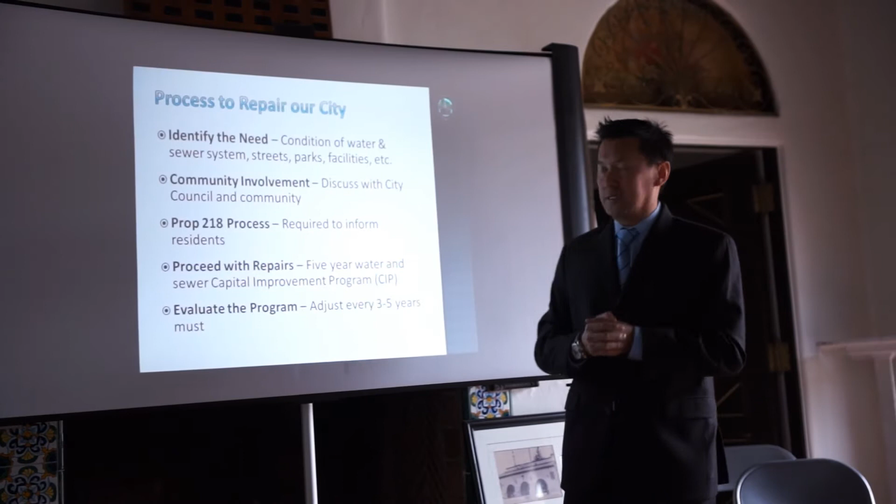Then the next part is the community involvement. We want to discuss it with the community, and we want to discuss it at council, and we said, this is what it looks like. We make adjustments to see if it's really needed and so forth. But we want your input.

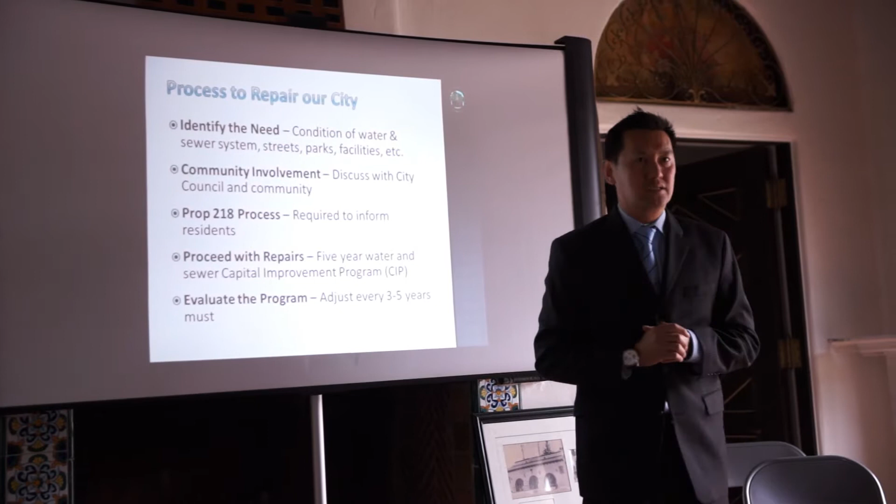What's unique with water, sewer, and refuse when we look at the repair of the system is it's required to inform the residents. And this is actually a really good process. We call it the Proposition 218 process. It's a legal process that we're mandated to notify every resident end user in Monterey Park.

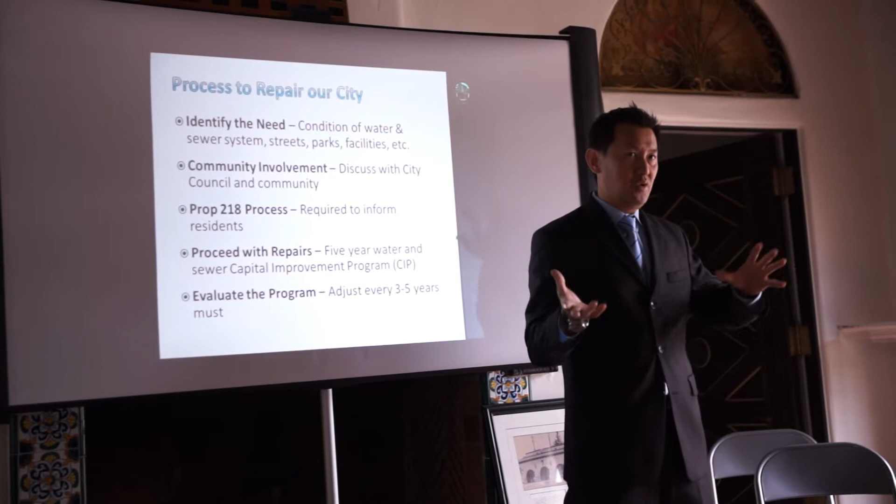Then if the community and the city council develop a proposal and they move forward with it, then we proceed with the repairs. Typically, the city would put together a 5-year water and sewer capital improvement program. We list out the projects that we have for the next 5 years, for the water projects and sewer projects, and we do annual evaluation of that.

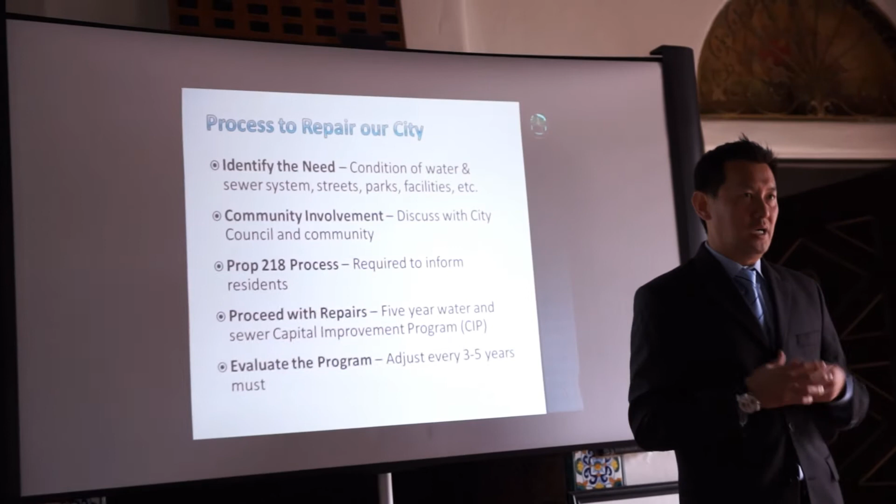We keep track of how we're doing each year, and within 5 years, we'll tell you how we're doing. And then we also have to look at the finances too. Unfortunately, money doesn't grow on trees, they don't come out of pipelines, so we have to generate enough revenue, collect enough from our community to pay for our system. You evaluate the system every 3 to 5 years.

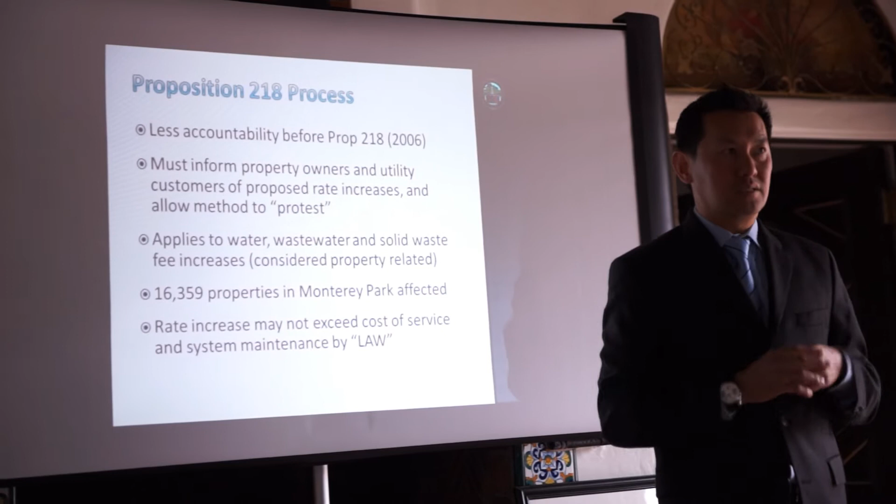So I'm going to talk a little bit about the Prop 218 process. At first, cities really did not like this process because we thought, my gosh, this is going to be a lot of work, there's a lot of concern. But it's actually really good because this brings a dialogue that's happening.

Every resident knows, every customer knows about the situation. We have to inform the property owners and utility customers, and you have an opportunity to protest. If you don't agree with the rates, you think this is not the right strategy, then you have an opportunity to protest. So again, it applies to water, wastewater, and solid waste.

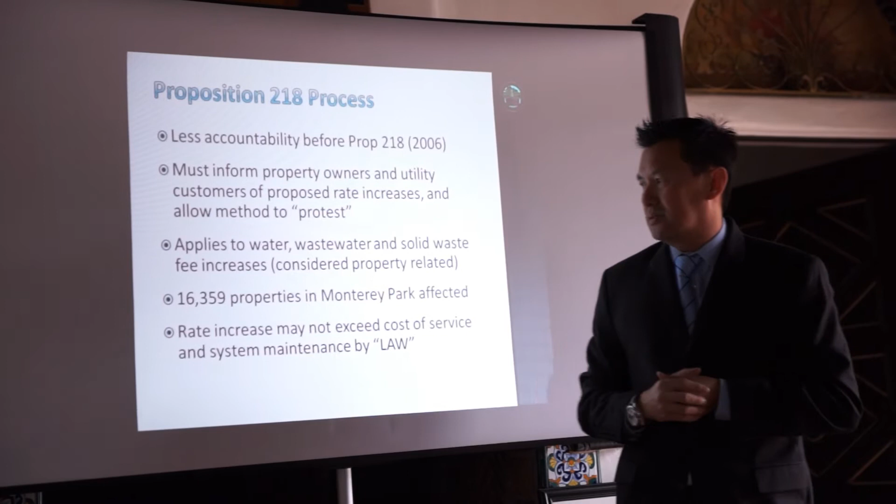In Monterey Park, it affects 16,359 properties. What I think is most important is the rate increase may not exceed cost of services and system maintenance by law. So by law, we cannot just raise the rate to some number that's out of the sky. It has to tie to the repairs that's needed.

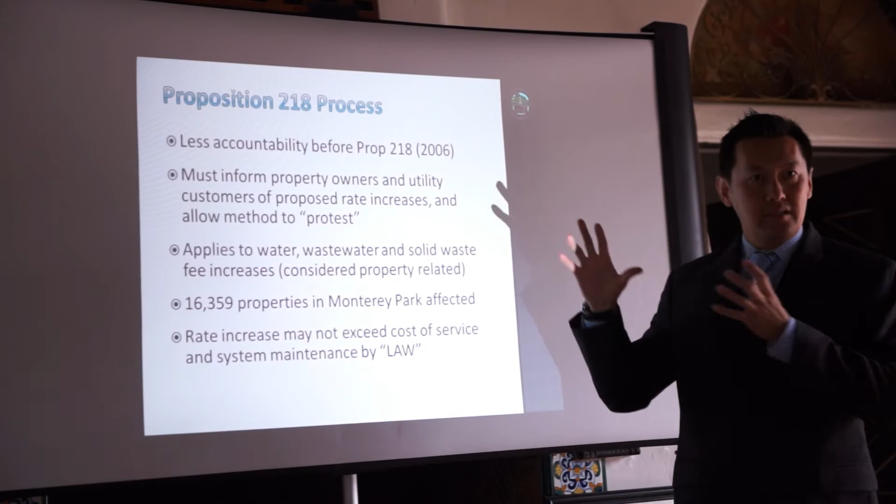If the repair is, what we're proposing is $100 million, council and the community cannot say, let's raise it to be $200 million just because. It has to tie to something. So that really connects things together.

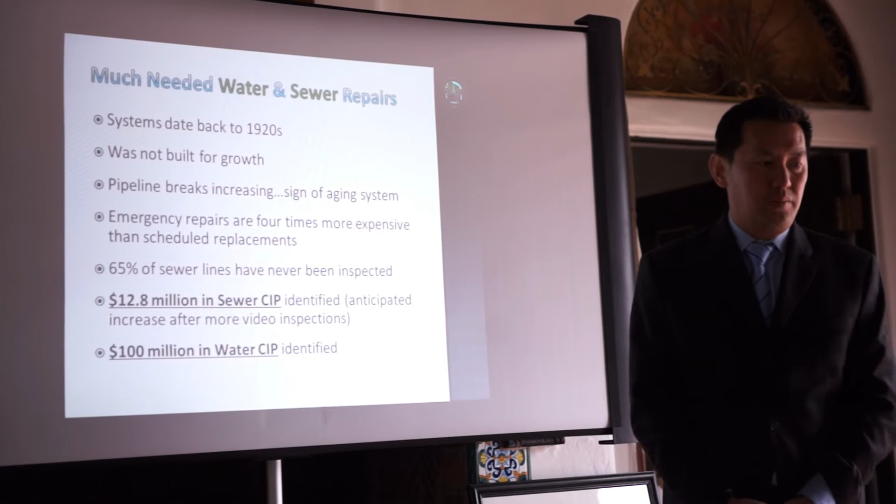So Monterey Park has much needed water and sewer repairs. The system dates back to the 1920s. That's a long time ago. It was not built for growth. When you're laying pipes into the system back in the 20s, 30s, 40s, you didn't expect this population. So it's putting more and more burden on the system.

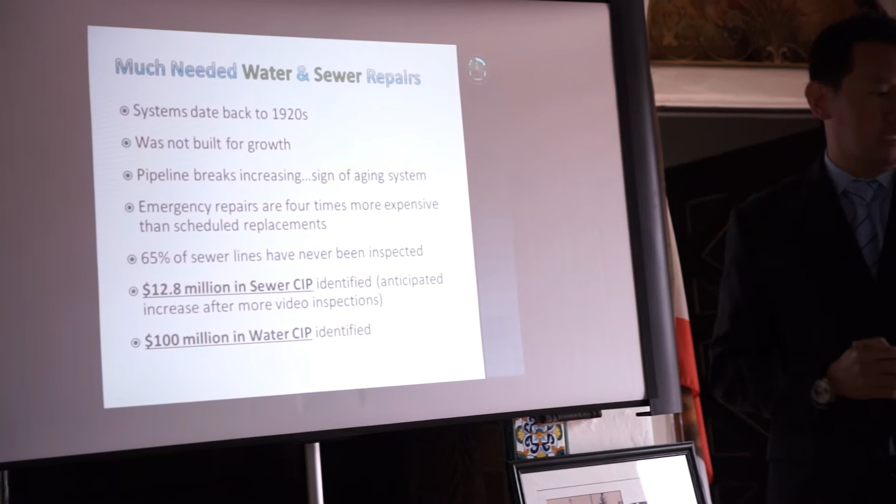And we have not been doing a good job at maintaining it. Ron will go into more detail about this, but pipeline breaks are increasing, which is a sign of an aging system. Emergency repairs are 4 or 5 times more expensive than scheduled replacement. Just like your car, just like your home, if you don't do the routine maintenance on it, it just costs a lot more to repair later on. And that's what we're trying to prevent. We want to build an efficient system for our community.

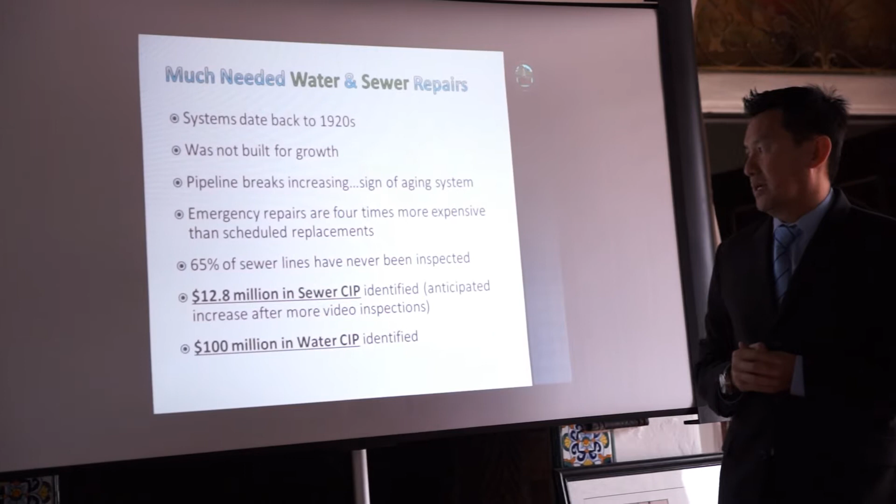What concerns me is 65% of the sewer lines have never been inspected, and Ron's going to show you some gory pictures later on. But that's pipes going back to the 1940s, 50s, 60s. No one has even looked at them, so we don't know what the conditions are, or if they're blocked or not. So it's a serious issue for us to deal with.

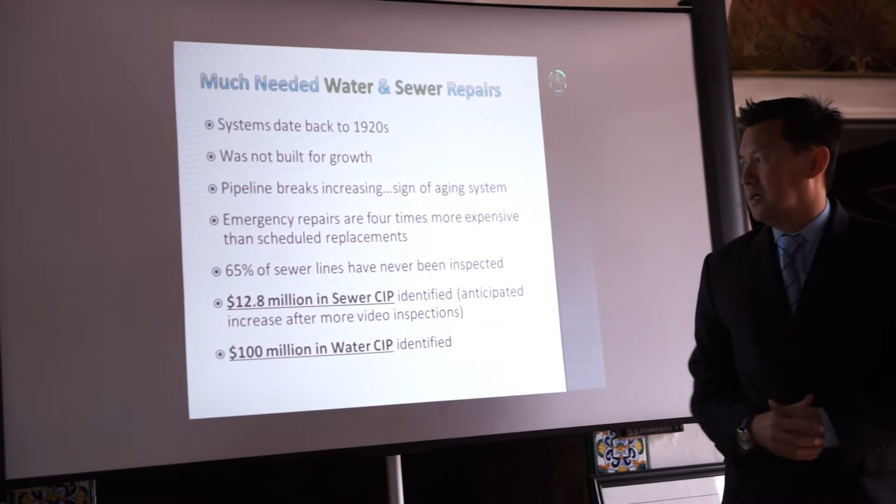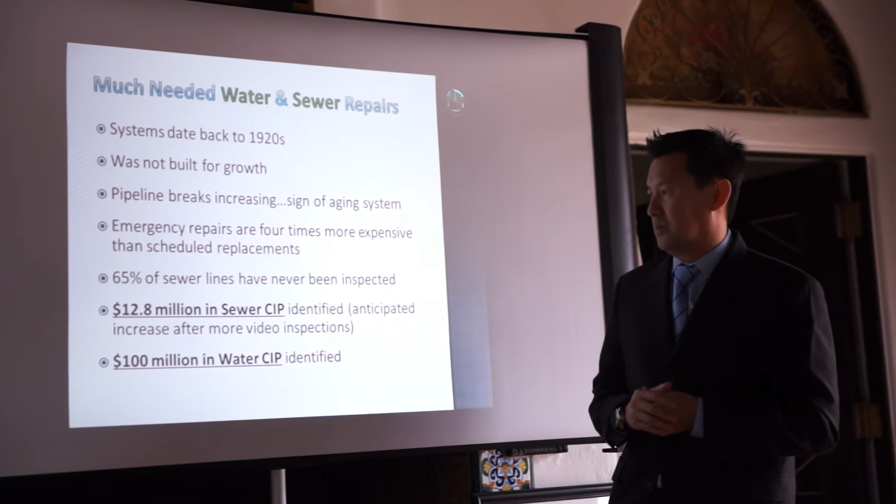So the studies we have are in two parts. There's $12.8 million in sewer CIP that's needed, and that's only on 35% of the sewer lines that we inspected. This one may go up later, but we're just focused right now on 5 years. We just gotta get some revenues in, and I'll tell you more later. And then $100 million in water CIP identified, and we'll get more detail about that.

So the council, what staff presented to the city council, 3 alternatives on how to generate enough revenues to repair our water system. The first alternative is sort of conservative: let's fix it as soon as we can so that we can avoid costly maintenance or costly repairs.

So the $100 million we were proposed, well, one of the alternatives is $100 million in 12 years, which brings in $42 million in the first 5 years. That would raise the rates too high a level, so it wasn't that successful, or wasn't that popular. The next alternative presented in the study was more reasonable.

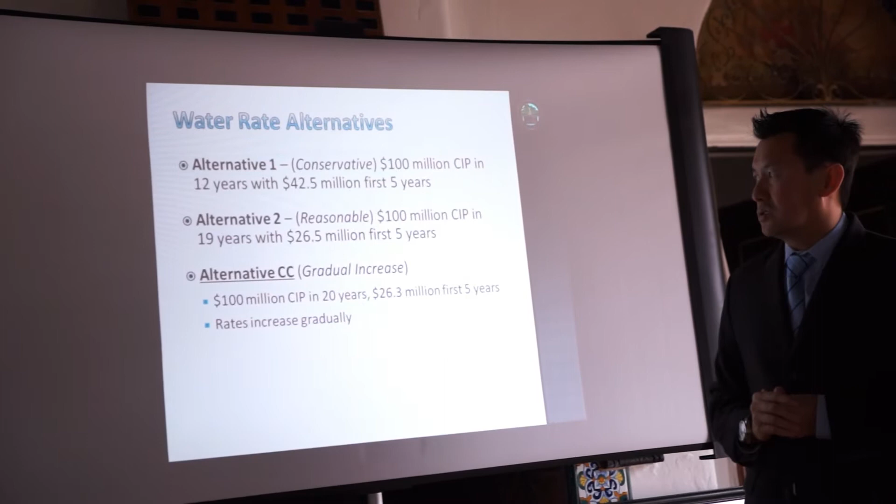It's $100 million CIP for 19 years for $26.5 million. That seems more realistic, but council looked at that and said that even that has too much of an impact on the community.

So there was another proposal, which is a more gradual increase. This one would say, next year go to the rate that's perfect, and then we'll go from there. But this one gives you a gradual increase, which gives businesses more time to adjust for the rate increases so that it won't be such an impact.

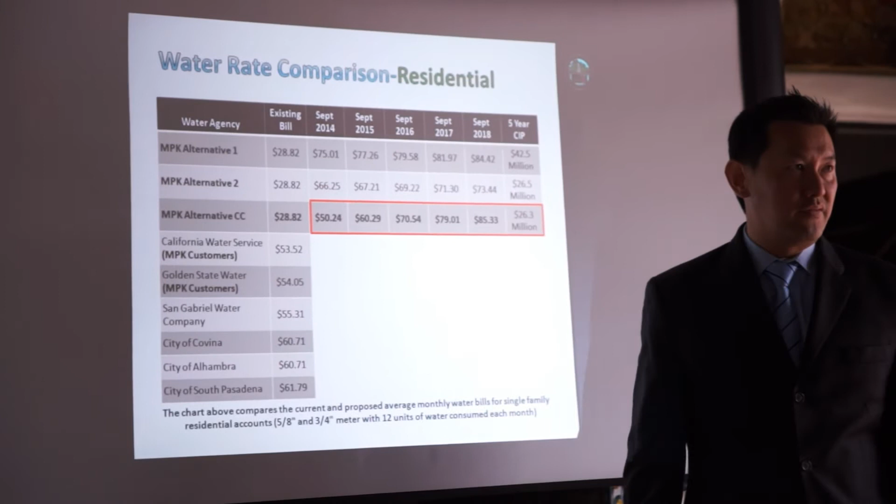Here's the 3 alternatives and the existing bill. Right now, residents are paying an average — the average resident is paying $28 per month for water services. Not all Monterey Park residents — some are served by a different water agency, and they're already paying $53 and $54. And then around the other area, the average is like $55, $60, $60, and $61.

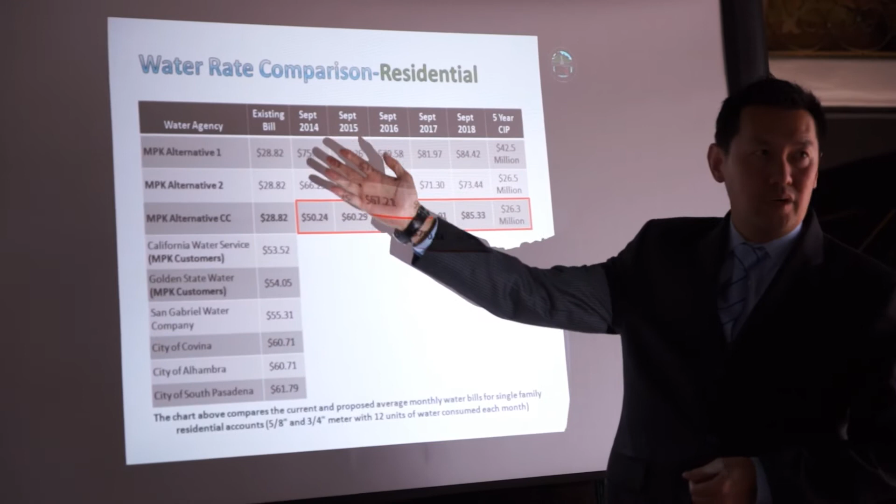So you can read this 2 ways. One is Monterey Park residents getting a great deal, but what you don't get is the repairs in the system. So that's what we're hoping to address.

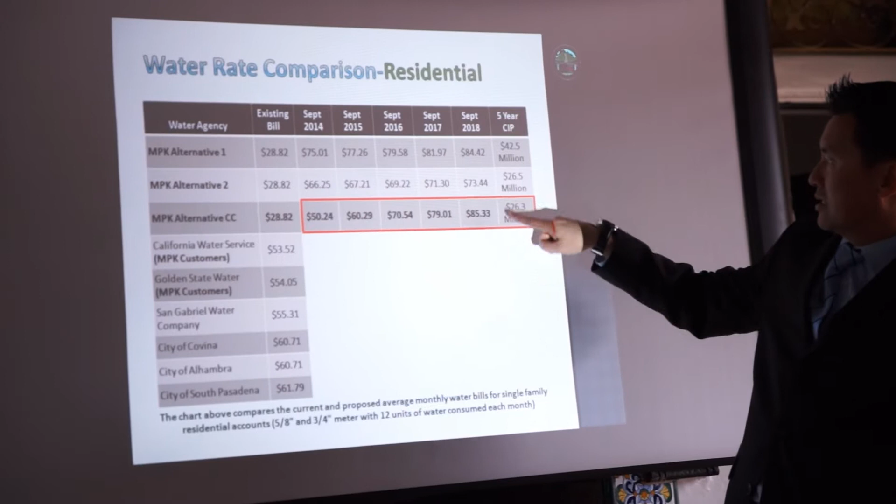So here's the proposal, and I'm going to stick with this one, the alternative that City Council presented. It proposed to jump from $28 to $50, and then 60, 70, 79, 85, and that collects the $26 million. As you can see, the $50 proposed is still below the existing rates of the others. So basically, council is proposing bringing it up to par with all the other agencies.

This is commercial. This one's probably what you're most interested in, and we put together a lot of examples. The water rate's based on basically 2 things: your meter size and your level of consumption. So here, a decent sized drugstore, they only have a 3/4 inch meter, they don't use much water, it's just basically the restroom. So 3/4 inch meter and 13 units.

Their current bill is about $42, and it'll jump up to $53, $64, $75, $84, $91. So that's for a business, not too much of an impact.

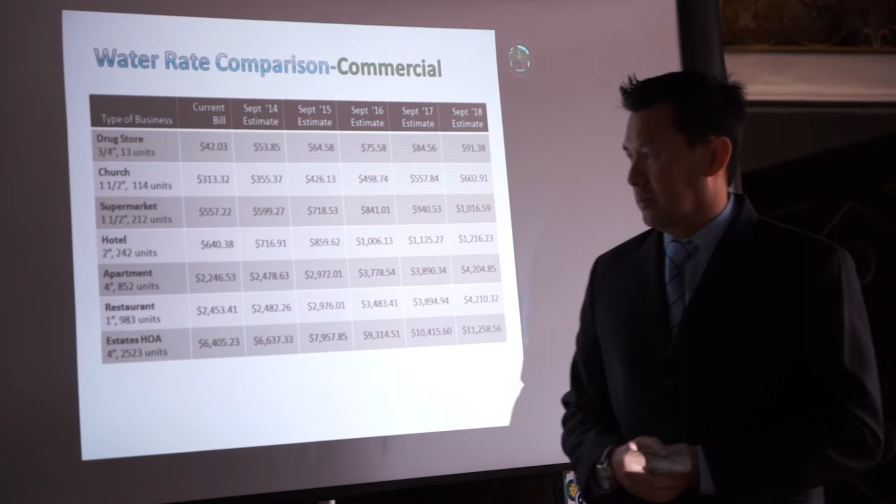I talked to someone about an HOA — if you have like a 100-unit apartment and so forth, they're probably about a 4-inch meter, and they're consuming 2,500 units of water. That's a lot of water, about 4 swimming pools a day, I think even more. It's just a lot — but it's a lot of units.

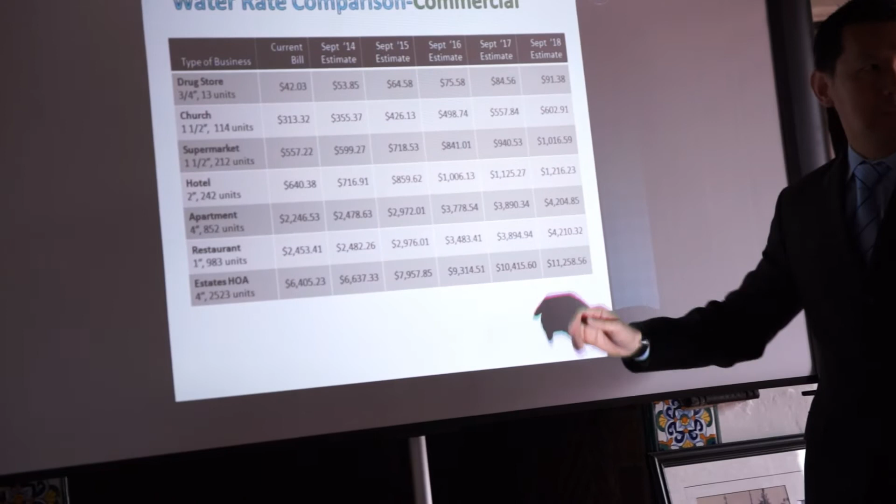So their average bill right now is about $6,400, and then it goes up to $66, $79, and so forth. What's good is it's gradual, and it also gives you the opportunity to conserve water by implementing technology to conserve water.

So for a church, again, $300 to $355. So the initial year change is not that much of an impact.

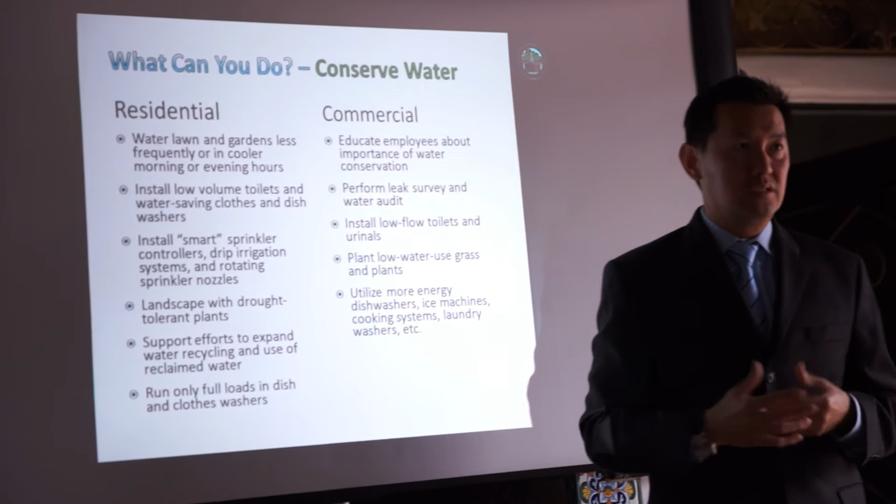So what can you do? For the residential side, definitely conservation is the way to go. The state right now is talking about the drought, so we really want to conserve water. That's the way to go. Water your lawn and garden less frequently, install low volume toilets, install smart sprinklers, and only run full loads of dishes and clothes washer.

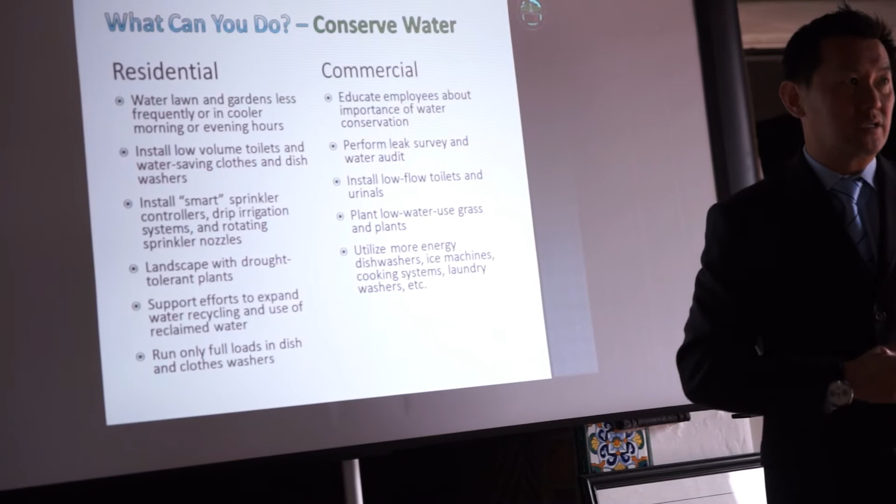On the business side, the commercial side, there are ways that you can conserve water. Just like utilities, your water, your cable bill, the cost of food, businesses have to adjust. For us, we're very concerned that we want to get a good system in that would not stop your business. So you can educate employees about the importance of water conservation, do leak surveys and water audits, and we can help you out with that.

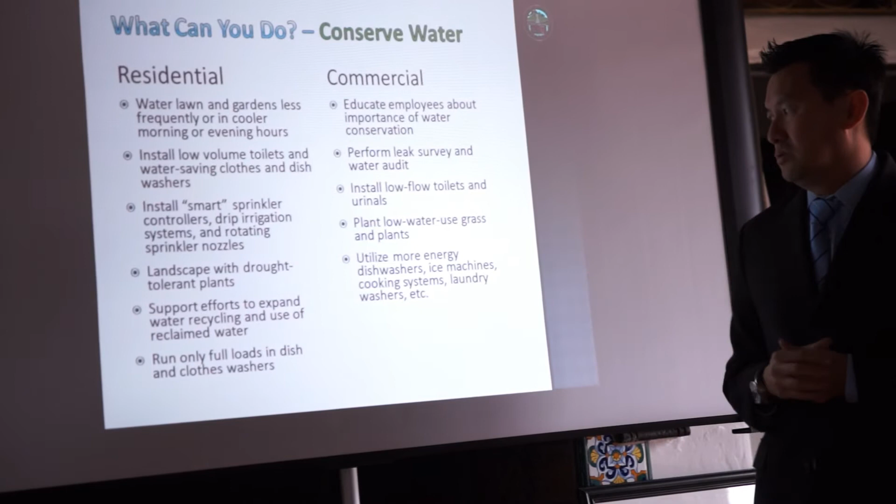Install low flow toilets and urinals, plant low water use grass and plants, and definitely use more energy efficient dishwashers, ice machines, cooking systems, and laundry washers.

So again, we're proposing a gradual plan to adjust the rates so that we can rebuild the water system and the sewer system, because it's a much needed repair. And with that, we're working with you. I'm going to hand it over to Ron to talk about the condition of our water and sewer system. Thanks, Chutai.

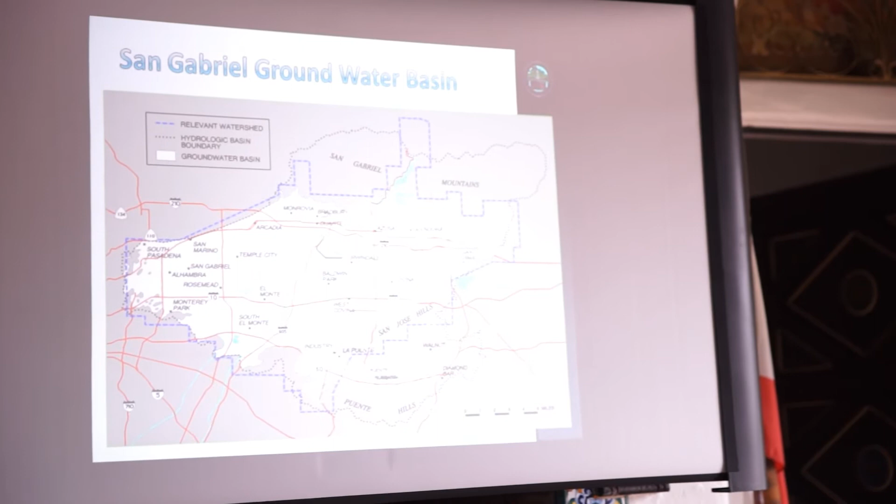So moving through the water system, just some real basics here. I want to get through the presentation really quick so it gives you enough time to ask questions. Basically, we get our water from the groundwater basin here. The basin stretches from the foothills down to La Puente, East LA to Pomona - that's roughly the jurisdiction, you can kind of see it here. There's roughly about 44 water companies, water purveyors that pump out of this basin.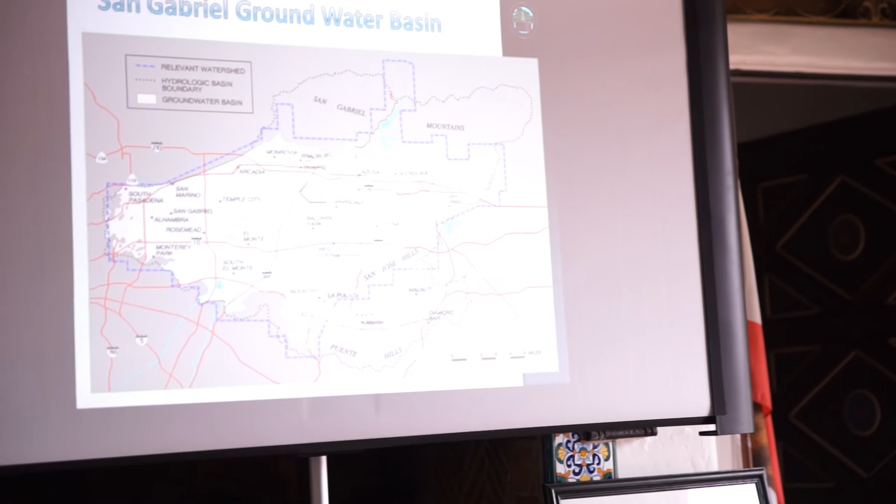Prior to 1972, basically everybody that had any type of well in the ground or ability to take water out was able to do that. There was no real management of the basin. And if you know anything about water, whiskey's for drinking, water's for fighting - people were fighting over water prior to 1972. So as part of a court adjudication, they formed Watermaster. Watermaster is basically the administrator and management group that takes care of the basin. They determine when it's safe to pump at specific levels, they keep track of the water coming in and out of the basin, and they are the administrators.

There's three ways of getting water into the basin: State Water Project, Colorado River, or natural rainfall, and also by conveying water from the dams. So that's really the generic 101 of how the water gets into the basin. There's a lot more detail, but I don't want to bore you with that.

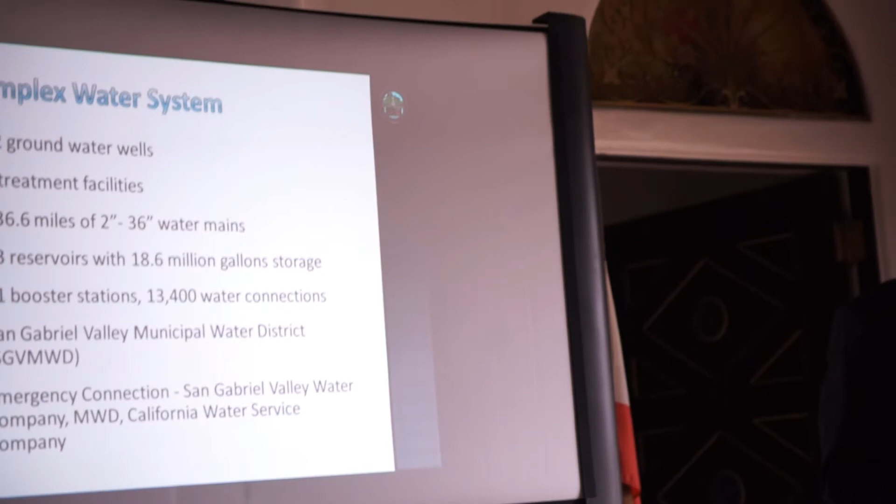I'll move on - just some of the system details. We have 12 groundwater wells over in Rosemead; all our wells are in Rosemead. We pump about a mile and a half across town into Monterey Park. We have 3 treatment facilities. Back in the days, maybe how we farmed our land and some of our bad habits as communities around the area, the groundwater became contaminated. There are different contaminants in the groundwater, so each water purveyor has to treat the water to specific specifications determined by the Department of Health Services. So the water that you receive is certified by the Department of Health Services.

The water companies are required to submit consumer confidence reports to all the residents in that community, and also submit reports to the Department of Health Services. That's kind of the checks and balances to make sure that you're getting good, clean water.

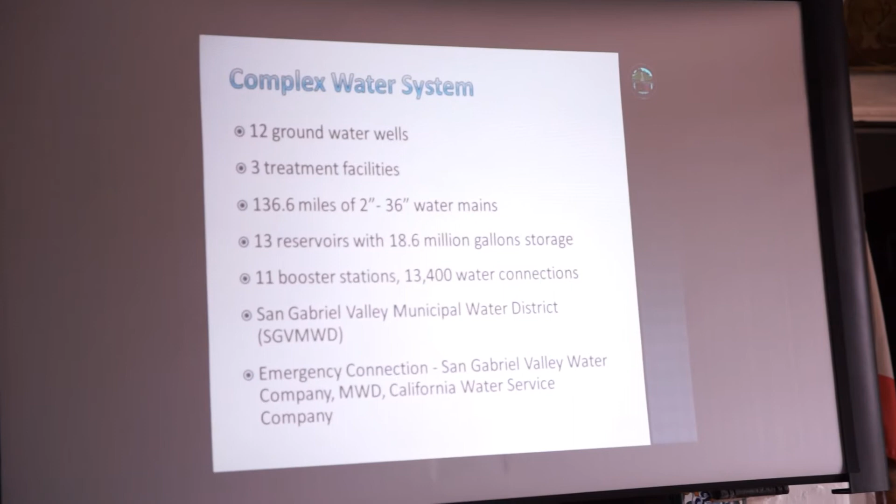We have different types of mains, 2-inch to 36-inch mains, 136 miles. We have 13 reservoirs, and just for conversation purposes, reservoirs are basically for two factors: fire protection and storage. Without reservoirs, your system's just pumping around, and you have no reliability. In case a fire comes up, you draw down the water in the reservoir. If an emergency comes up or you have an earthquake, you have storage there. Pipes break, and you have water in the system that you can actually get to different areas. So reservoirs are very important, just as much as wells, getting it out of the ground to getting it across town.

Booster stations, we have 11 booster stations. Because of our geography in the hills, we have to have stations that pump it from one level to another. We have 13,000 water connections. San Gabriel Valley Municipal Water District, we have a connection with them and can also receive water from them, and we have emergency connections with San Gabriel Valley Water Company, MWD, and California Water Service.

We serve 62,000 customers, over 1,500 businesses. We produce 8.6 million gallons on average, and then we consume, and this is a key factor between these two numbers, 7.8 million gallons. That's what we register on our meters throughout our system.

Average of what? Pardon me? On average of what? Average across all the meters in our system. On a day, on a year? On a day. Okay.

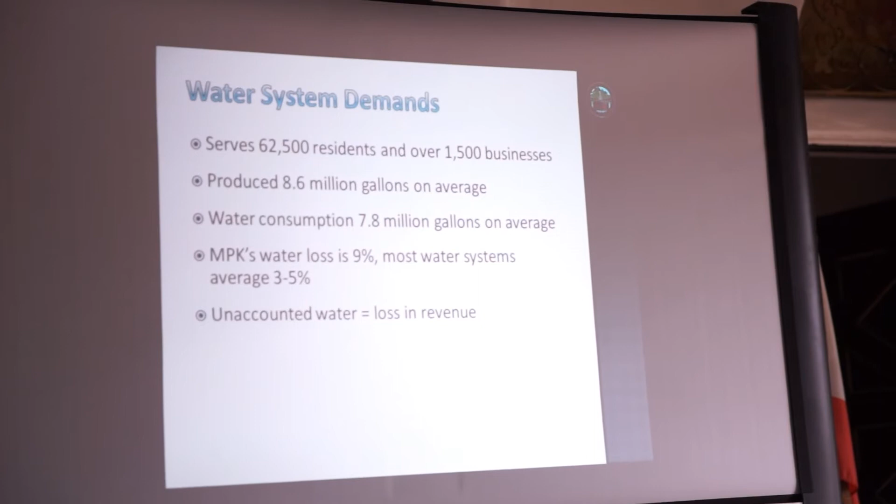So with that, you can see the difference between the two numbers. There's a lot of water loss in between. On average, most systems have a water loss. A good system that's pretty efficient is between 3 to 5%. We're a lot higher, our system's a lot higher. It's about 9%.

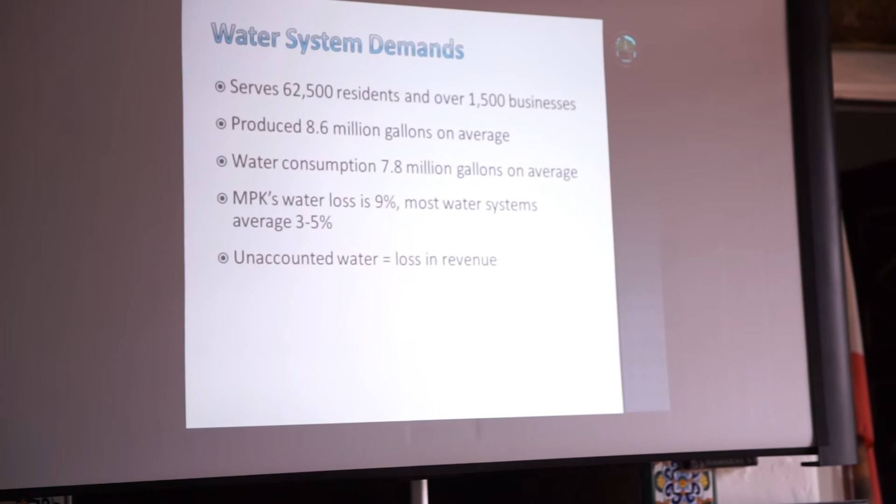It can be anything. It can be from meters that are old and slow in registering the water going through them. It could be water main breaks that we have that is unaccounted water. We could have people using water from fire hydrants that we do not meter, they just take the water from the fire hydrant. There's various different ways that water gets lost. So that's a key component right now that we're really concerned about, the unaccounted water loss, and also the loss of revenue.

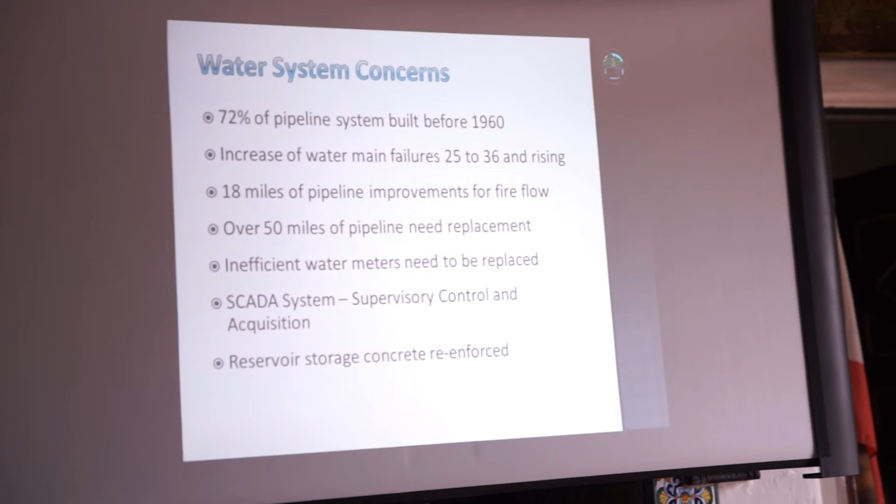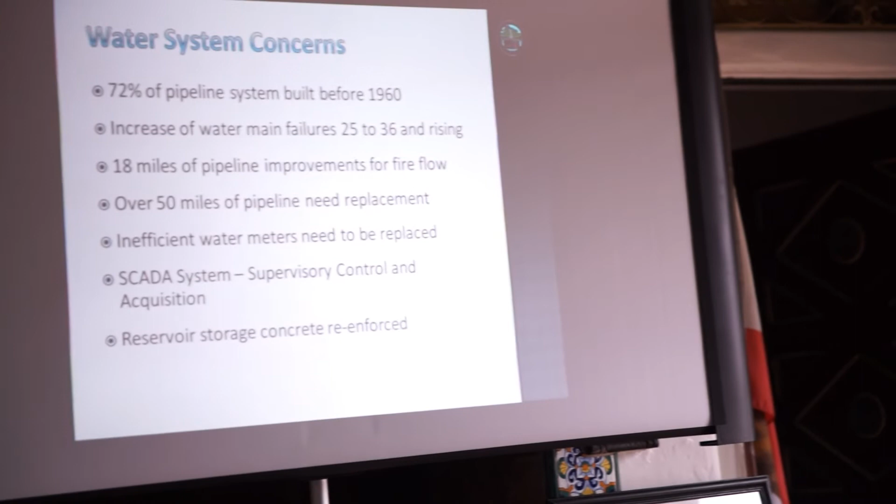The concerns are, as mentioned here, 72% of the pipeline was built before 1960. That's a long time ago. I know there are experts out there that say pipeline can last 100 years or even more. True in some cases, but there are a lot of factors involved when you're looking at pipeline: characteristics of the water, the type of soil that surrounds the pipe. There's a lot of criteria that affect the reliability of the pipeline. So to say there's a clear-cut way of putting in a pipeline or constructing this or doing whatever it may be, it's not that clear-cut.

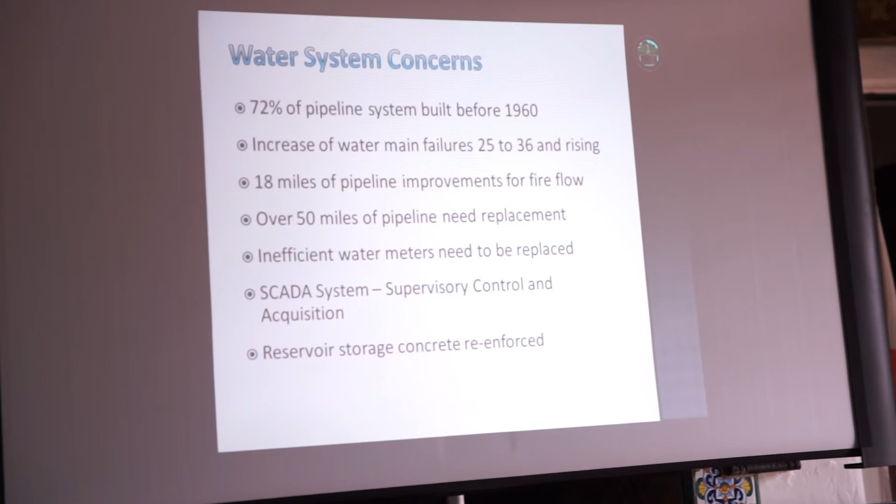It's old, the system is old. We need to put some money into our system. Increase of water failures, I mentioned water main breaks, they're on the rise, 25 to 36 main breaks. They can range anywhere from 4-inch lines up to 8-inch lines, and the majority of our main breaks are on distribution lines, the lines that actually feed customers.

So when we have to fix a line, we have to take it out of service for some amount of time. And like I mentioned in other presentations, it never happens when you're at work. Never. It always happens when you're getting ready to cook, getting ready to take a shower, getting ready to go to work. I've had people come and yell at us because they've got suds in their hair and we shut the water off. But we gave them notification that we have to shut the water off in order to fix the line. So there is a huge inconvenience, and that's just on the residential side.

You can imagine what it would be like on the commercial side, which many of you are from the commercial sector. I remember several consecutive years where Marie Callender's had to be put out of service for water, I think it was during Thanksgiving or during a holiday. And that didn't just happen once, it happened twice.

Taking that line out of service to Marie Callender's has a lot of impacts to businesses, because once you cut the water off, Department of Health Services says you can't serve food, you can't do a lot of things. So there's a huge impact to businesses when the lines go down. I'm not here to scare you, I'm just telling you the facts.

These are just the facts, right? 50 miles of pipeline needed to replace. There's inefficiencies, like I talked about with water meters.

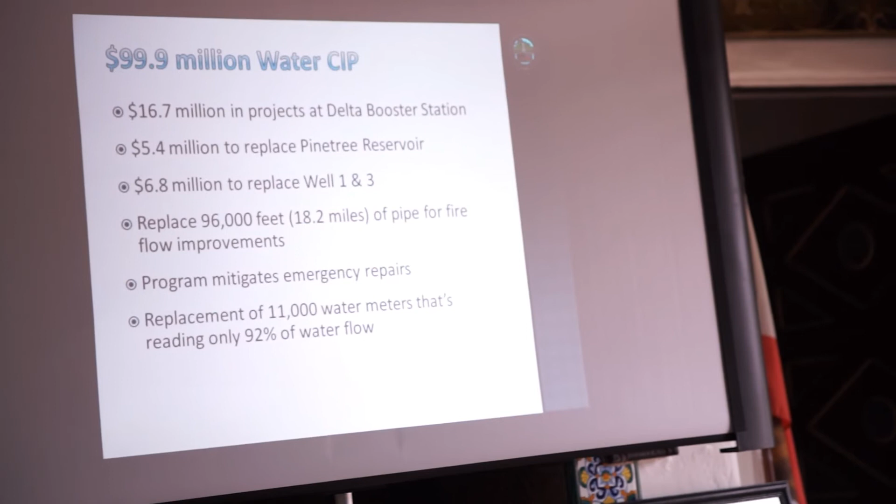These wells were drilled and built back in the 50s. You can rehabilitate them, give them TLC, but after a while you're spending money that you really shouldn't be. You should actually be drilling another well and taking that one out of service.

We're looking to replace 96,000 feet of pipe, which is 18.2 miles, for fire flow improvements. The area I'll show you in the upcoming slide has several criteria other than just fire flow: deficient pipe size, age, material, and the type of soil around it. It's just a candidate for replacement right away.

As we replace all these different pipelines, it also mitigates some of the emergency repairs we've been doing in the past. We know the areas that are bad. I can tell you right now, De La Fuente, right here, 2 blocks away, is a huge candidate for replacement, because that's put together with just repair clamps, keeping it together. Everybody on that street can attest to it, they've been inconvenienced tremendously over the years.

Sewer systems. I know you guys have been dying to talk about sewer systems.

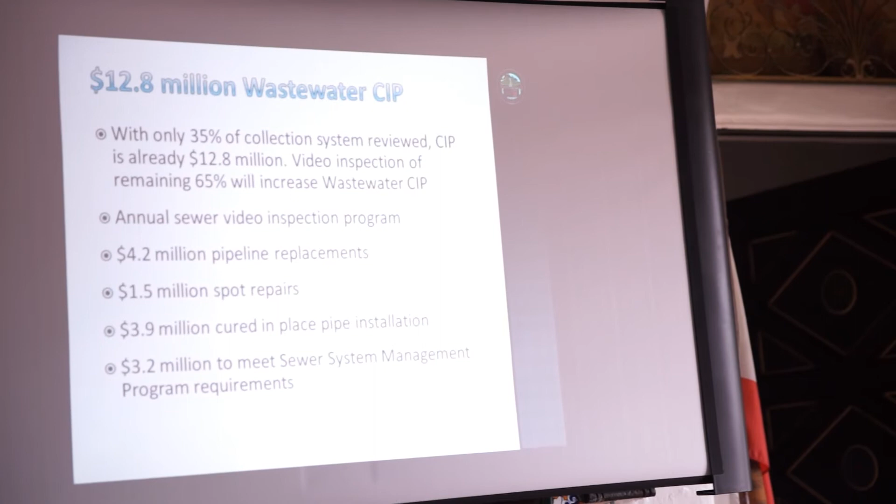$12.8 million of capital improvement we're looking at. As Chu said, we still have 65% that needs to be videoed, and we've only inspected 35%. So in that 35%, we're estimating to spend about $12.8 million because of that inspection. And not only are we looking to repair those spots, we're also looking to inspect the other 65% that has not been inspected. We need to know what we're dealing with.

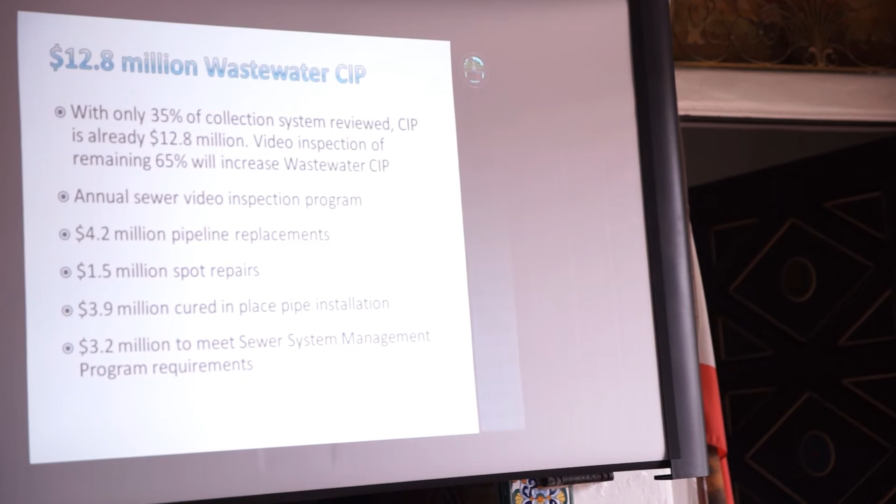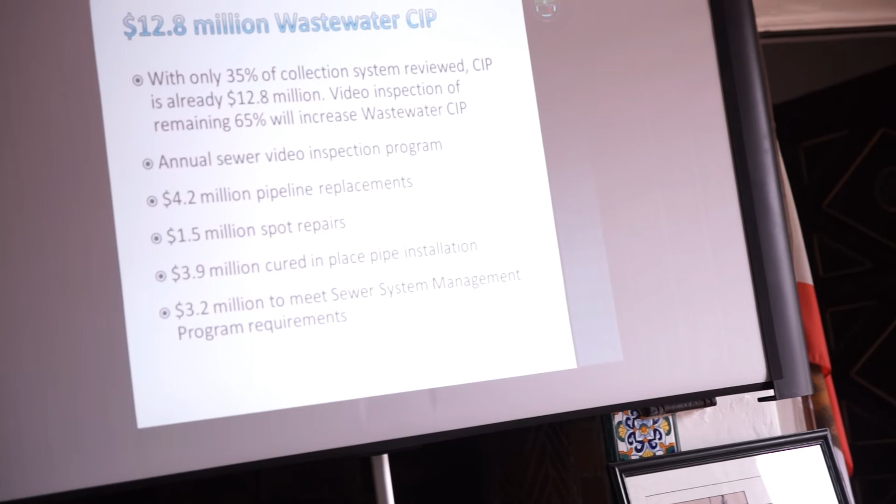Pipeline replacement, spot repairs, cured-in-place pipe installation. A resident mentioned it at the last council meeting that you can line pipe—you can actually put the lining in there. You can do that in sewers, you can do that in water too. But when you do it in water, it restricts a lot of the flow that it was originally designed for. So when we get down that road, we'll have to see if those pipes are candidates for lining.

We have a sewer system management program that's required by the state. Every month we have to submit a report to the state on any type of overflow or anything that has resulted in us not maintaining our system. And some of those overflows, if they go into a main waterway—I'm not scaring you, this is the fact—if it goes into a major waterway, it's a fine by the regional board that we have to absorb. And when I say we, I talk about us as a community, because I'm a resident here. We have to pay for it. It comes out of the city funds.

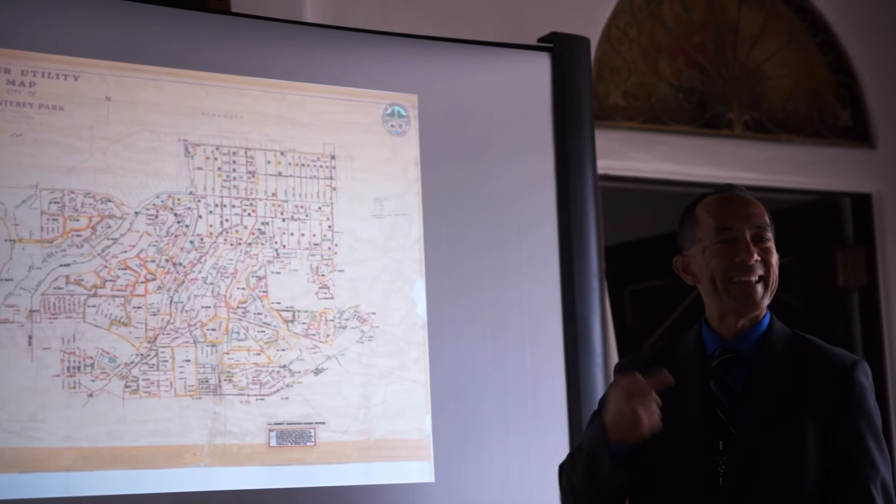This is really vague to see. This is on some old paper, drafting paper. That kind of shows you how old our system is on the sewer side. We've neglected it. On the water side, we have really good maps of every pipeline, services, meters—we know where everything's at. This is kind of like a hand-drawn map of areas, spots that we are concerned about, spots that have blockage problems because of grease or roots, so we have to maintain that on an ongoing basis. So you can kind of see what we've been dealing with on the sewer side of the house. It's just an old, archaic way of assessing and keeping track of your infrastructure on the sewer side.

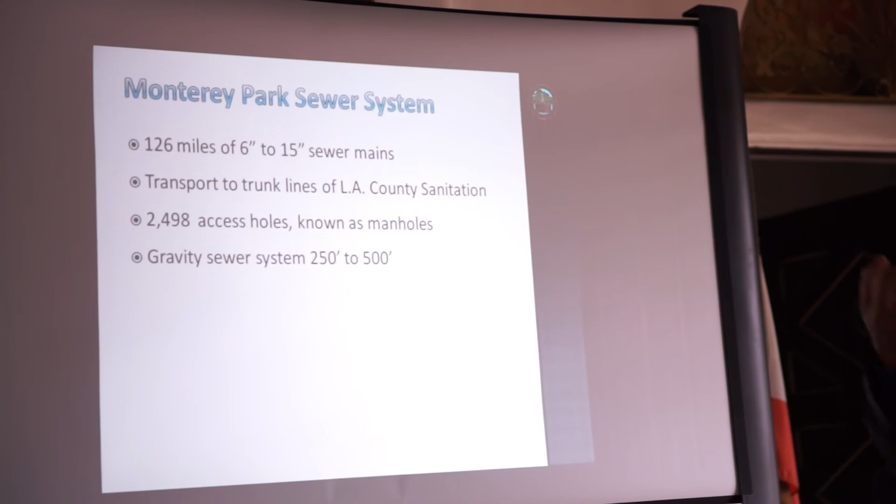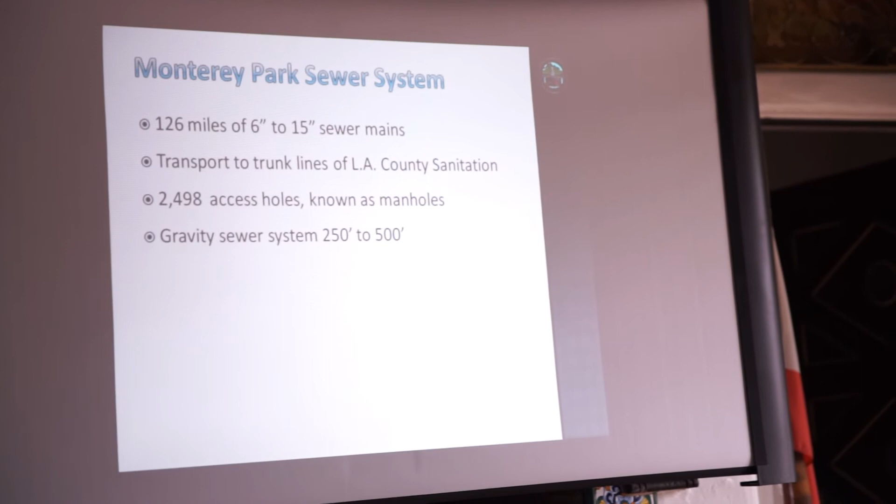126 miles of sewer, 6-inch to 15-inch. We just transport the system, the sewage. Basically from residents, we take it into our sewer lines and we put it into the county lines. And then once it gets to the county lines, it goes to their treatment plant—either it'll go down to the 60 and the 605, I don't know the name of the plant, or it'll go down to Long Beach. Basically, those are the two areas. We have access holes that allow us to get into them and clean the lines. And then it's a gravity system, basically elevations that differ so drastically between 250 feet to 500 feet. So there's a lot of flow coming down in some areas because of the hills.

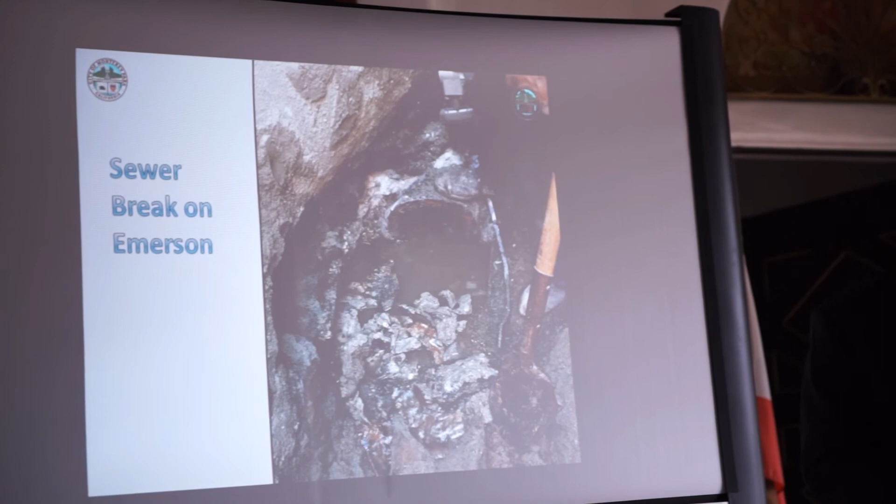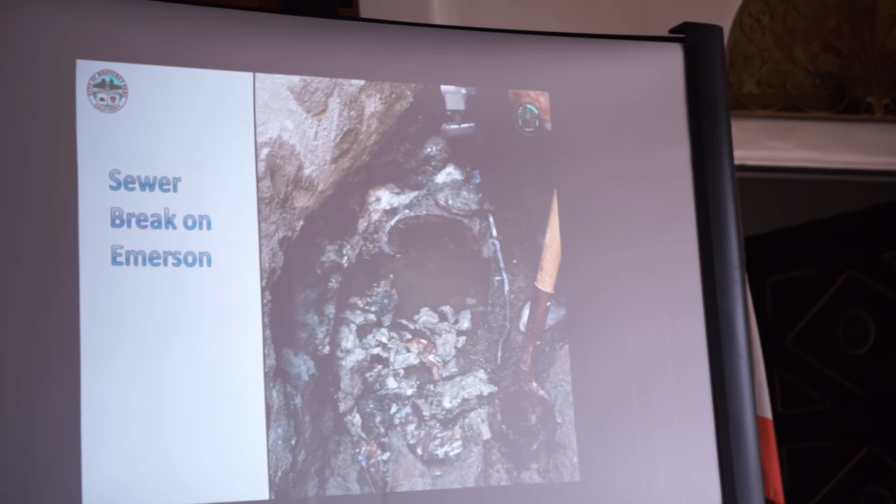This is one of the most recent sewage breaks that we've had, on Emerson and Atlantic. If you're familiar with the area, you have Ralph's parking lot right on the corner. Then there's a little house as you go easterly on Emerson, and then you have the recycle place. Well, that little house is the first connection. When this line got blocked, it actually came up through the connection and came out of the bottom of their clean-out that happened to be open underneath their house. So they have a raised floor, and it basically flooded the bottom of their house. I wouldn't say they're lucky, but if you're dealing with this type of stuff, it's better underneath the house than inside of your house, because at least you can mitigate it and clean up underneath your house and get it sanitized a lot easier than it is inside of your house. Inside of your house, mitigation is just so tough to get out all that sewage.

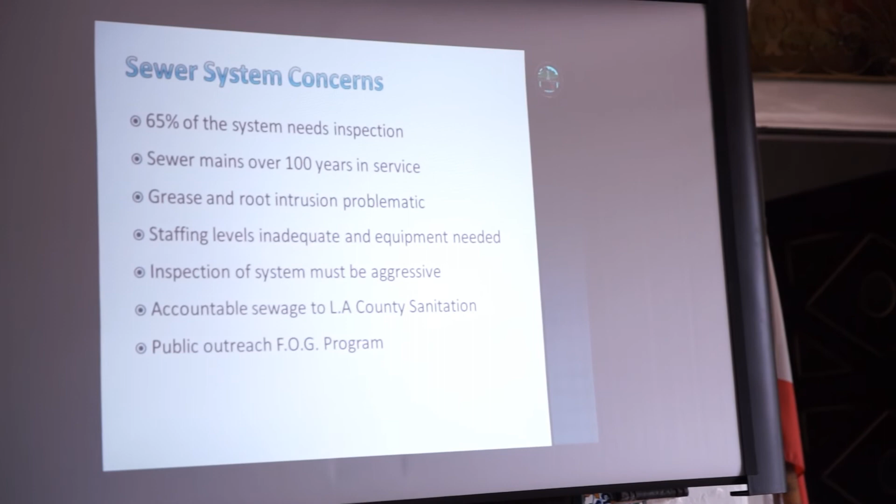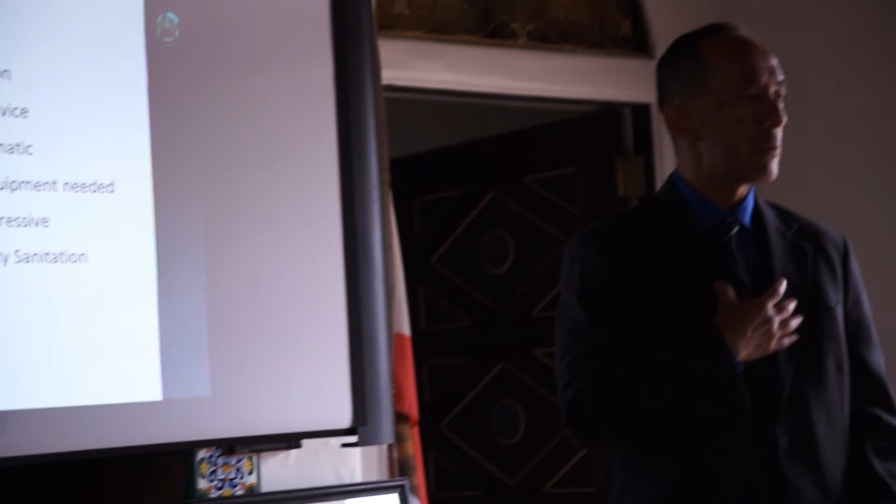So here are the concerns, these are the facts: 65% of the system needs inspection, we need to do that. Sewer mains are over 100 years in service. Roots and grease are two major issues we deal with all the time on a daily basis. And when people say, well, you're dealing with grease, well, grease isn't always from commercial. In my experience, I've got over 20-something years of experience dealing with sewers—it's residential. Because we regulate the amount of grease through grease interceptors and traps that are within commercial properties. But in a residential home, what do you do? With the grease that we used for cooking, there's only two ways to get rid of it: down the drain or in your trash.

What's the easiest way to get grease into the system? While you're washing dishes, right? It goes down there and into the sewer line. If the sewer line has a slow flow, the grease sits there, hardens up, turns into a solid, more grease comes down, it gets bigger, and you have a blockage. Kind of like an artery, I guess. That's what we deal with in grease.

Then we have trees. Some people deal with trees on their property that affect their lateral line coming from their house, so they have to repair that. We deal with the same thing—we have trees in the parkway that are ours that tend to get into our lines too. Roots love to go wherever the moisture is, and if there's any separation, or they can just have a taste of that liquid, they're going to find it. That's what we have to deal with in the sewer lines.

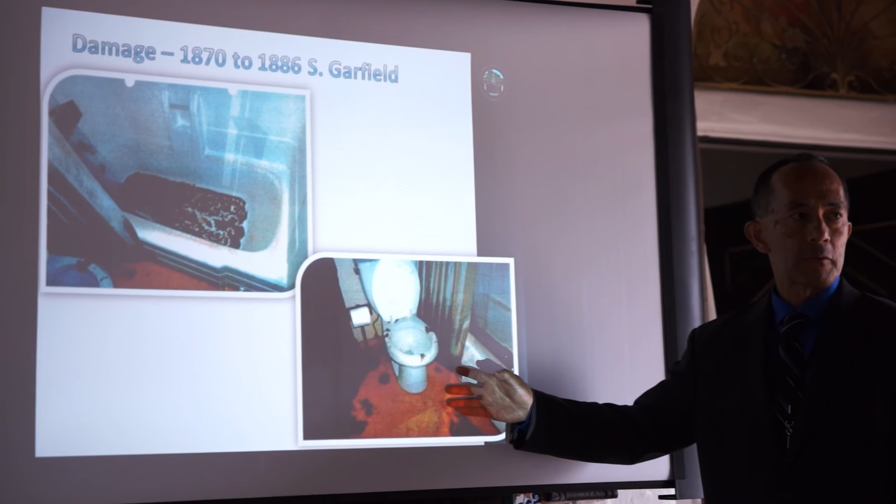System damages—1870, 1886 South Garfield, you can kind of see it. This stuff came back up through the drain, out of the toilets. That's why I said it's very hard to mitigate a sewer backup once it gets inside your house—you have to rip out the floors, take out the drywall, and there's a lot of mitigation that has to be done. You're looking at carpet, furniture. Some of these claims have reached up to $379,000. This is money we have to pay, money we've never budgeted. It's part of the claim system we're responsible for. And when I say we, the city, we have to do this.

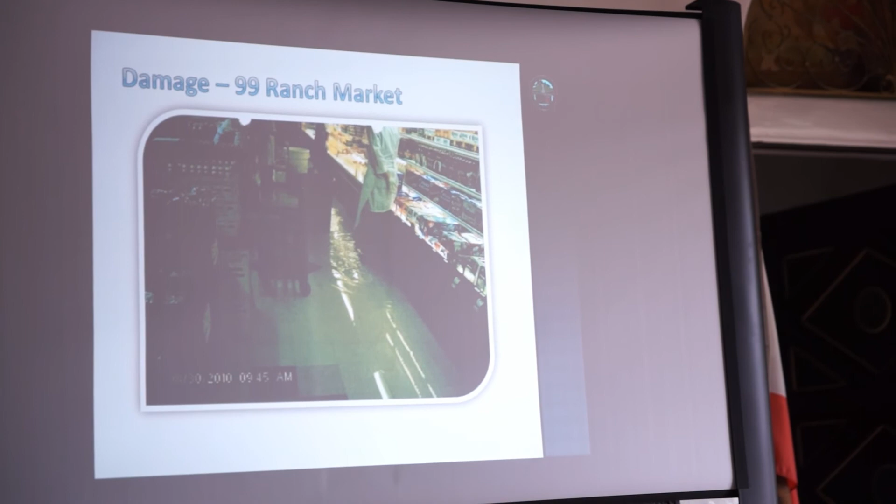This is 99 Ranch—same thing happened. I know when you look at it, you might think it's just a puddle of water, but this puddle is actually gray water with all kinds of bacteria in it. And we're talking about a supermarket, so you can imagine what it takes to mitigate that in a market.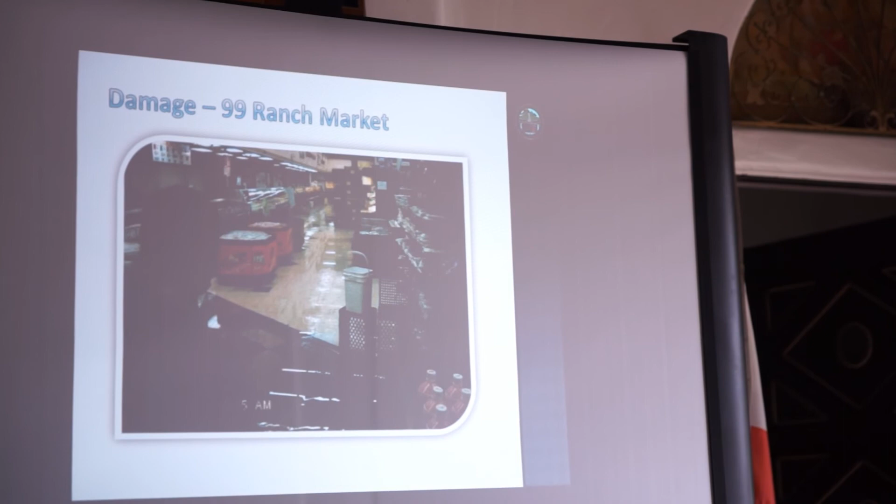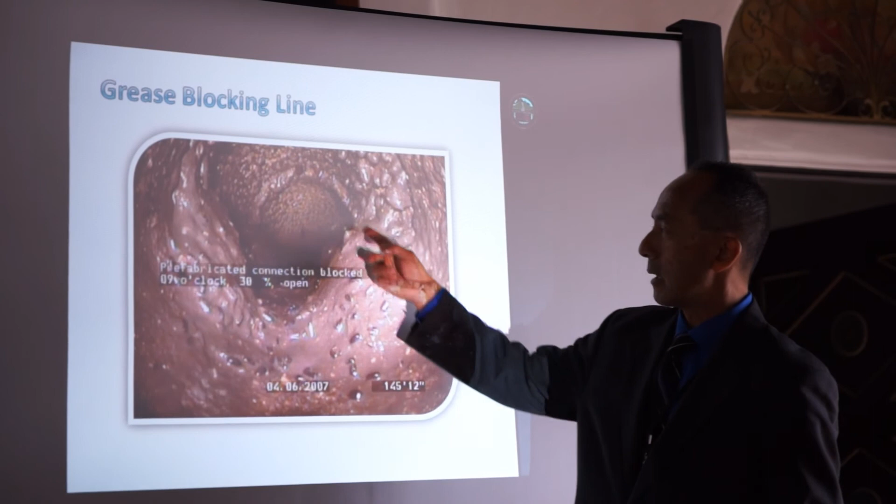Kind of the same picture, different area. This is a gross picture—I know it's kind of old, but it really depicts what we deal with. It almost looks like somebody's tonsils, but it can look like a lot of things. This is all grease—this is the actual opening that has been constricted by the grease.

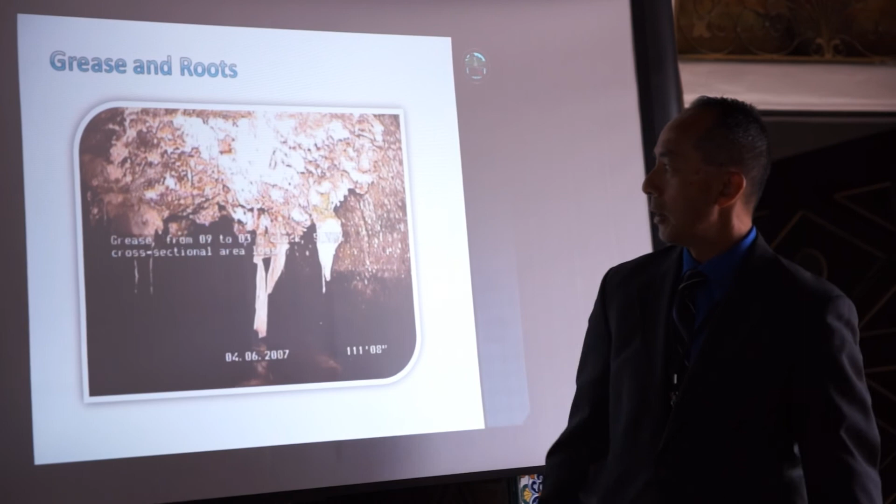So we have to go in there, take a high jetter line, and clean the line out. Another issue is a combination of things—you have roots intruding into the top of the sewer line, grease that's attracted to the roots, and toilet paper.

Well, toilet paper, people say that it just pretty much breaks down. Well, it doesn't break down that fast. It's still hanging there. And this is what could happen if we have a backup.

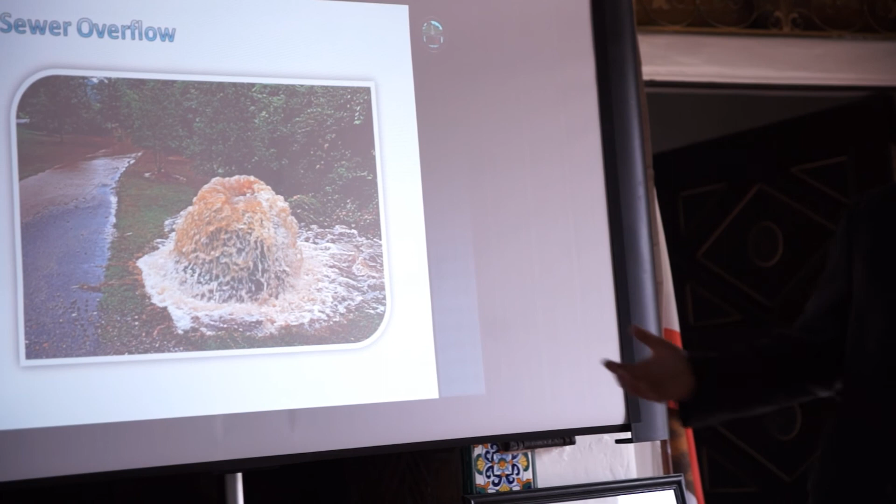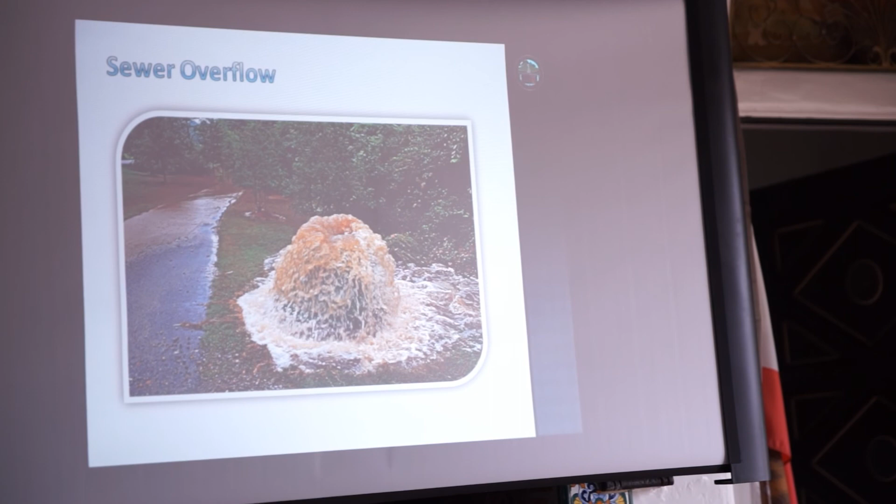This is a manhole cover that actually has relieved all the sewage. This is not Monterey Park. I just wanted to show that this, in the real world, this happens. It doesn't flow that much out, but it breaks the seal of the manhole and it comes out. And this is where the regional board is really hot on utility companies to make sure they have a program to maintain their system, because they do not want this sewage water down the channels and into the beach. That's basically the bottom line of that part.

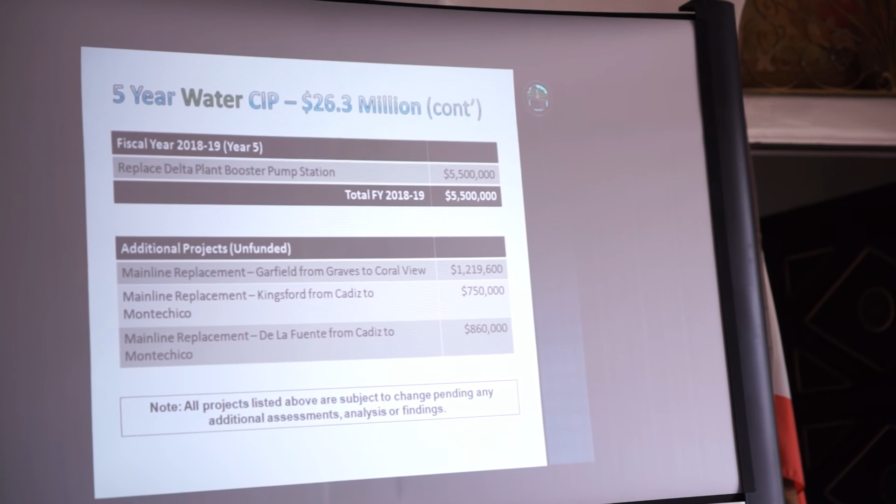Then we got the booster stations. This is the 5th year, and just to remind everybody, council is really adamant on making sure whatever money we raise in these rates, that every year we are monitoring what we're spending and what we're spending it on and showing proof. Because I think everyone's concerned that they want to make sure if I have to pay this rate, that money is going to some good in the infrastructure. And we're responsible to make sure that that happens and we show proof of that.

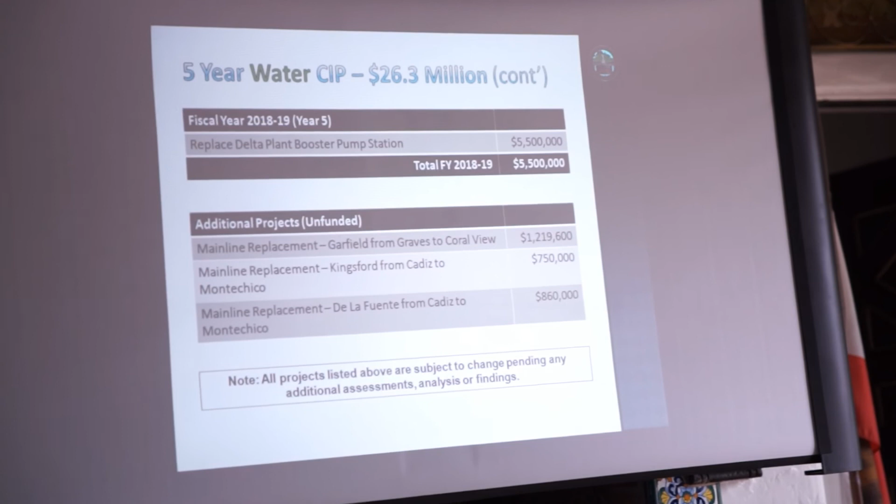And after 5 years, it's regulated that we have to come back and reassess the whole program again. So this increase is for the first 5 years. Even though we want a lot more money for 20 years, the 5 years is first out of the gate, and that's what council's going to look at. And then at the end of 1, 2, 3, 4, and especially the 5th year, they'll reassess it and say, okay, where are we at?

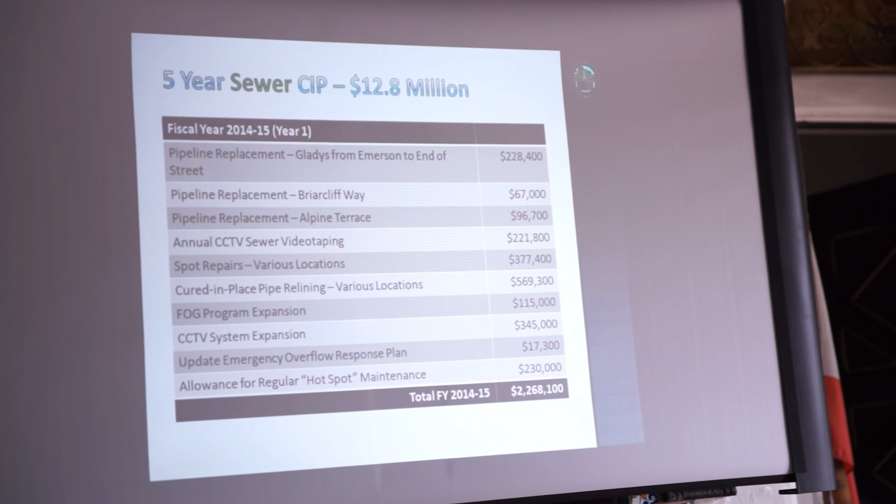So I'm just showing the project area, like I talked about, northeast side of town. And then here's the sewers. Sewers are kind of all over the place, just because of the various different issues that we're dealing with. Grease, old lines, tree roots.

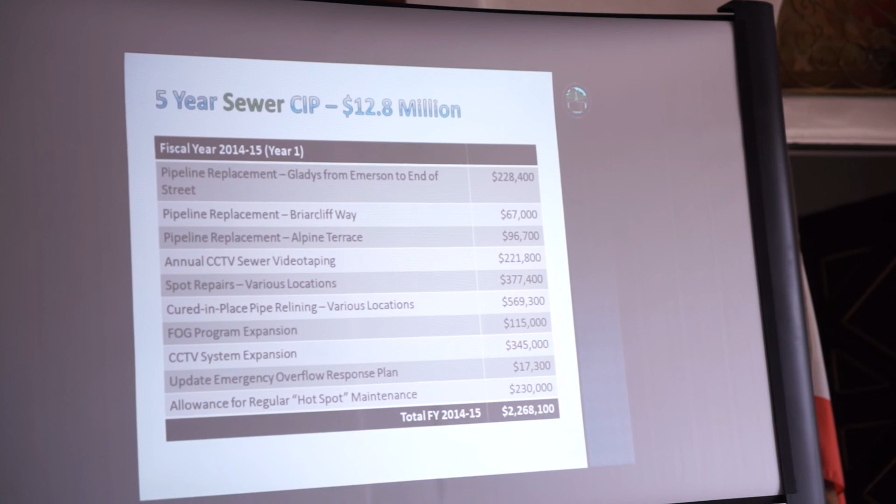What I will also show you is that in that first year, we're videotaping that other 65%. And every year, we need to continue videotaping. And then we're also making sure we come out of the gate with an aggressive outreach program, and then updating some of the state mandates that we have to do. And some of these programs you have to continue. Year 3, pretty much the same. And 4 and 5.

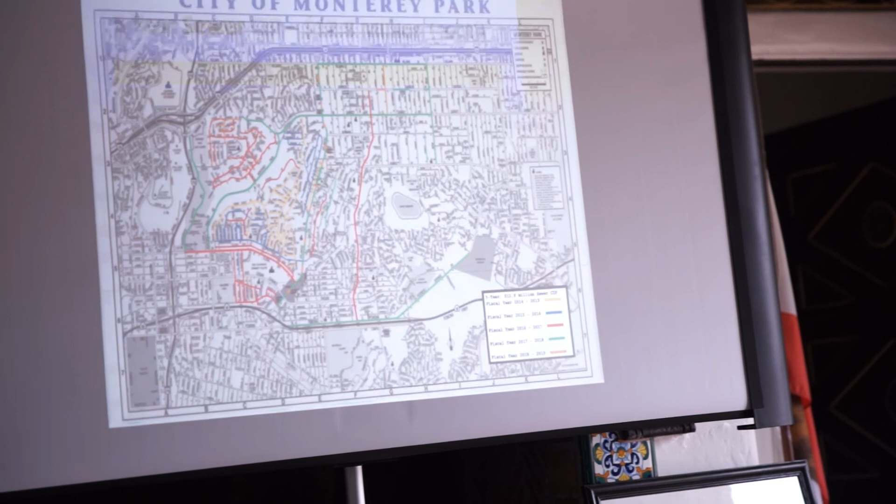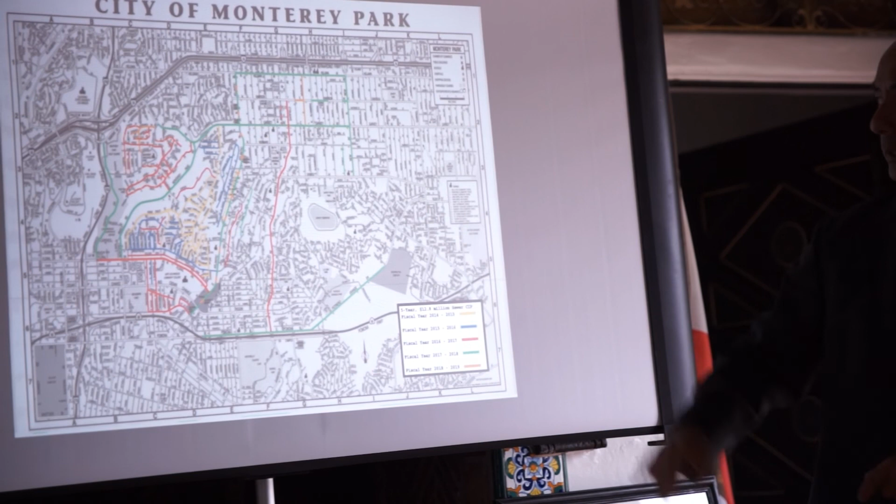So when you look at this, some of these are solid lines. No, we're not going to replace all of Garfield. But it was so hard from such a big view to actually point out the spots. So this is all spot repairs in the different areas. It's not like a whole replacement of a line, so don't get scared about that when you look at that. It's just really hard for us to put those spot repairs in there.

And that's only for 2017, and then what do we do then? Then we have to take a look at what the contract's going to be, and then reestablish what the trash rate's going to be. So that's all we're asking for. It's pretty straightforward, there's no smoke and mirrors or anything. It's pretty straightforward, and I think that's it.